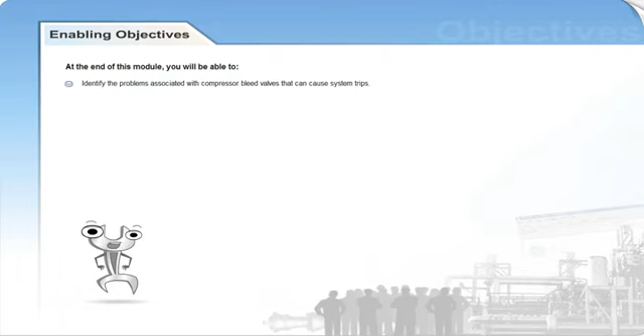Did you know that the unit trips if bleed valves do not open within 11 seconds of the generator breaker opening during shutdown? In this module, you will identify the main problems associated with compressor bleed valves and explain the procedures and inspections you can perform to reduce system trips. At the end of this module, you will be able to identify the problems associated with compressor bleed valves that can cause system trips, and identify the inspections and procedures needed to prevent trips due to compressor bleed valve problems.

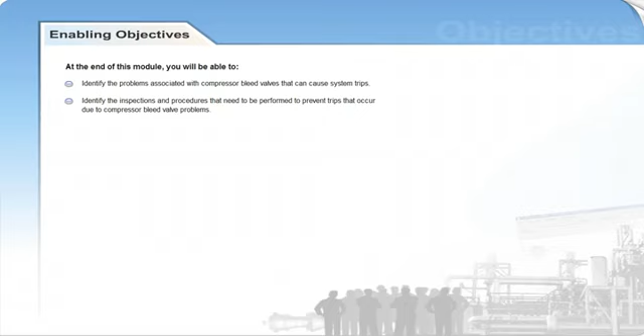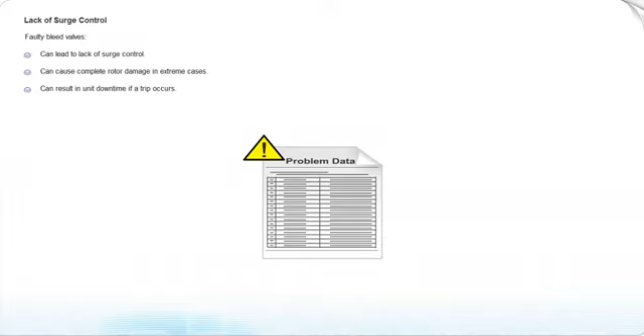It's important to keep track of the wide range of problems that faulty bleed valves can cause. Lack of surge control can cause complete rotor damage in extreme cases and, in all cases, can result in unit downtime if a trip occurs.

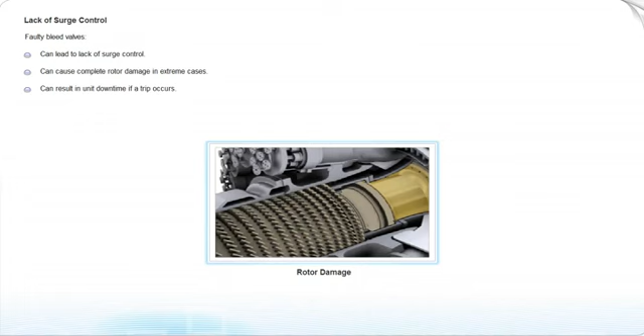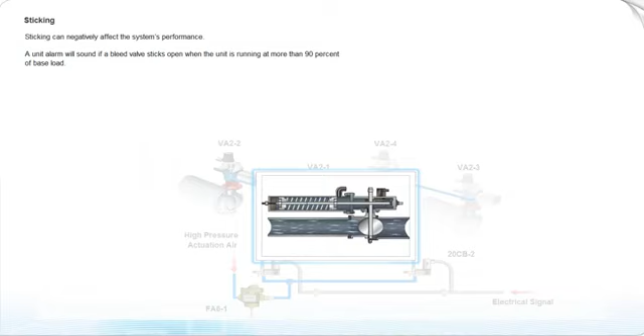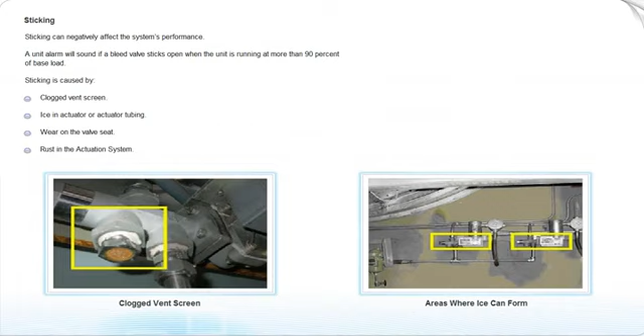Sticking is one of the primary problems associated with compressor bleed valves and can negatively affect the system's performance. If a bleed valve sticks open when the unit is running at more than 90% of base load, the unit alarm will sound. Sticking can be caused by a clogged vent screen, ice in the actuator or in the actuator tubing that carries the air supply, wear on the valve seat, or rust in the actuation system. Moisture, dirt, and oil are all in the vicinity of the actuation system. Therefore, the system requires regular cleaning and maintenance to prevent these contaminants from impacting the performance of the system.

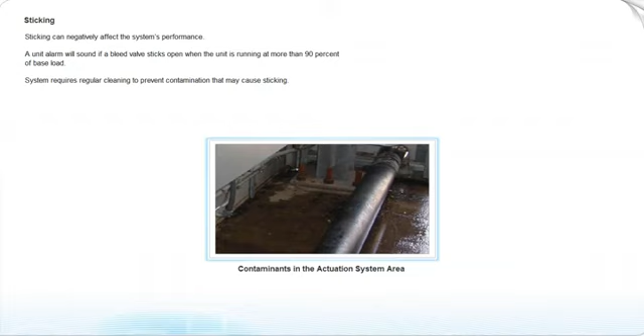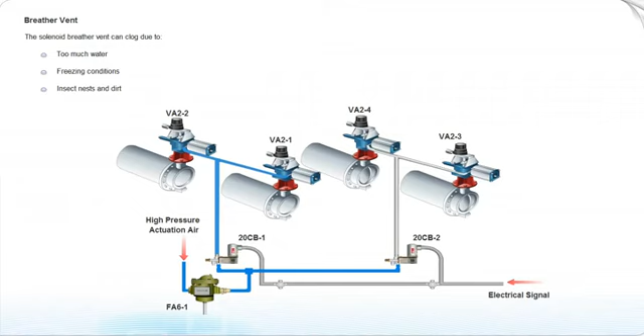The solenoid's breather vent can get clogged and may cause a system trip. Substances that might cause a clog are too much water, freezing conditions, insect nests, and even dirt. If this vent is clogged, the valves may not open at the correct time and the turbine may trip. Inspect the vent to ensure that the air can freely flow from the vent port of the solenoid to the atmosphere.

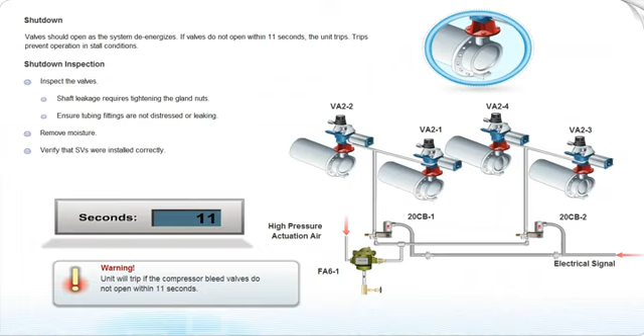During shutdown, the bleed valves should open as the system de-energizes. If the valves do not open within 11 seconds of the generator breaker opening, the unit will trip. The trip is necessary to protect the compressor from operating in stall conditions during shutdown.

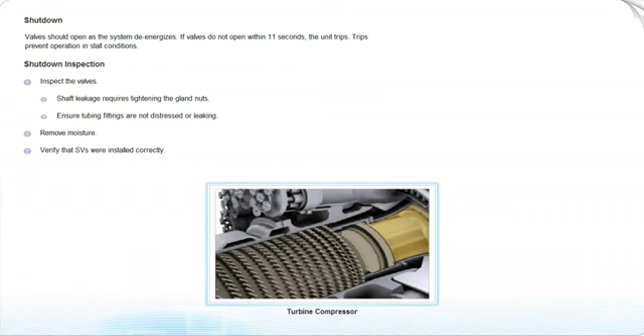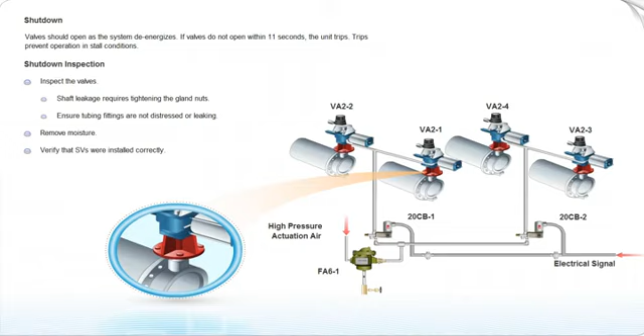If a trip occurs, perform the following inspection prior to restart. Inspect and test the VA2-1 through 4 valves to ensure proper actuation. Also check for leakage. If you can see shaft leakage through the packing box, tighten the gland nuts in half-turn increments until the leakage stops. Then inspect the tubing fittings to ensure they are not distressed or leaking.

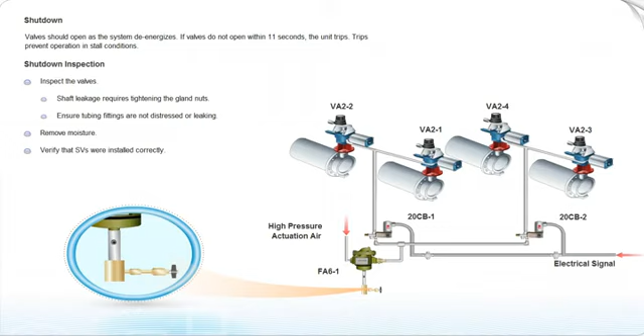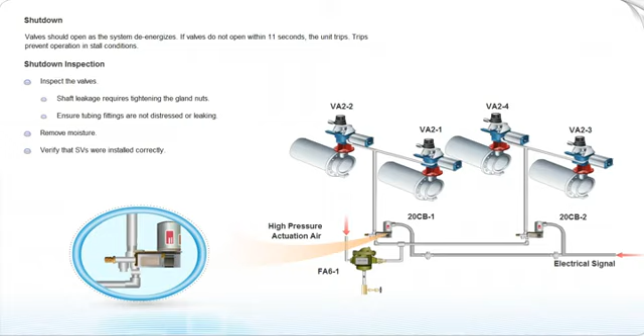The continuous blowdown function of the system should have routine inspection performed to confirm moisture is running away from the actuating air lines. Any moisture buildup in the system must be allowed to drain. Inspect the 20CB-1 and 2 solenoid valves to ensure they function properly and are installed according to the applicable drawings. These valves provide actuation air to the bleed valves that must be installed precisely as indicated.

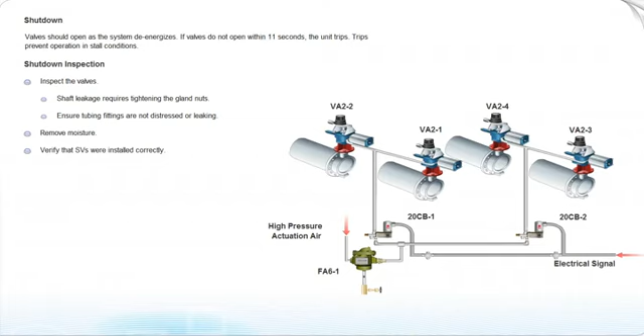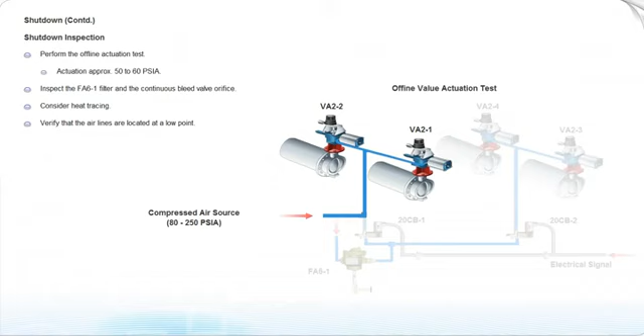Perform an offline valve actuation test using a portable compressed air source, 250 psia maximum, 80 psia minimum. Attach the compressed clean dry air source line to the 1-inch actuation air line at a location upstream of the solenoid valves 20CB-1 and 2 to test the system. You can attach the air line downstream of the solenoid valves to simply test the bleed valve actuation. Verify that the bleed valves actuate when pressure is applied to the line, approximately 50 to 60 psia.

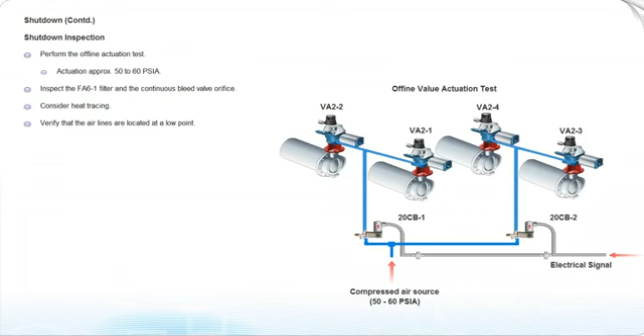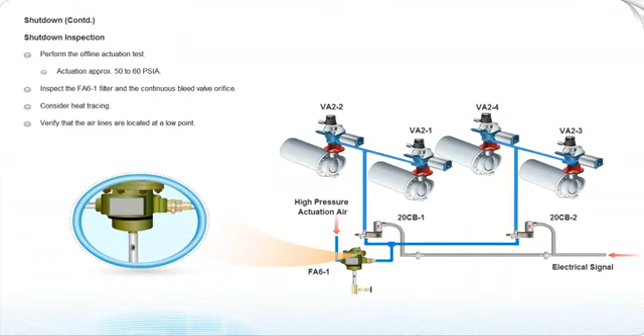For units so equipped, inspect the FA6-1 filter and the continuous bleed orifice to ensure they are not clogged and are free to drain. They should be installed, per the applicable drawings, at a low point relative to the solenoid valves to prevent the collection of condensation in the tubing.

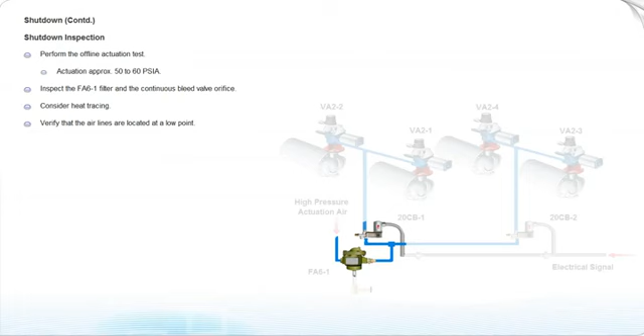For units in cold weather surroundings, the recommended procedure is heat tracing of the tubing, filter, and solenoid valves. It is also important that the actuating air lines slope to a low point to prevent them from freezing. Freezing of the solenoid or tubing can cause actuation issues with the bleed valves.

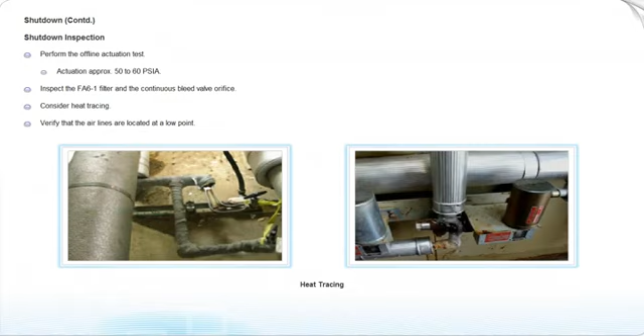During periods of extreme cold, condensation in the actuation air line can freeze inside the valve body, leading to slow or no actuation when required.

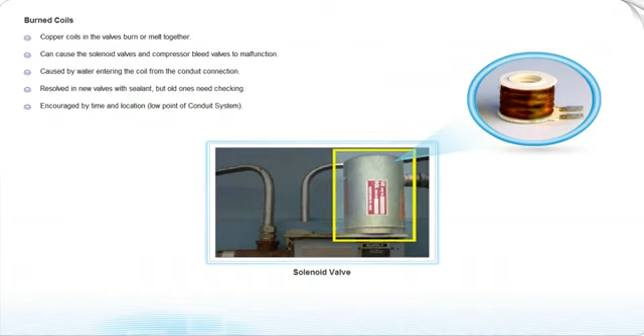Numerous valves have been returned to the supplier with burned or melted copper coils. Burned coils can cause the solenoid valves to malfunction, and as a result, the bleed valves will not actuate closed. The root cause is attributed to water entering the coil area from the conduit connection.

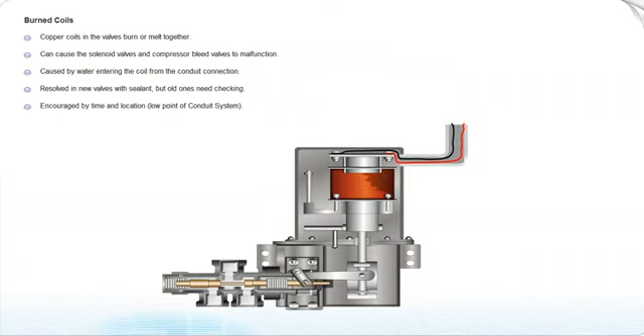The valve supplier is committed to supplying a sealant at this connection for future valves, but the 33 CB valves on the site should be checked for water.

The valve may sit outside for some period of time before the conduit is run to it, and even when the valve has conduit threaded to it, the valve is still the low point of the conduit system.

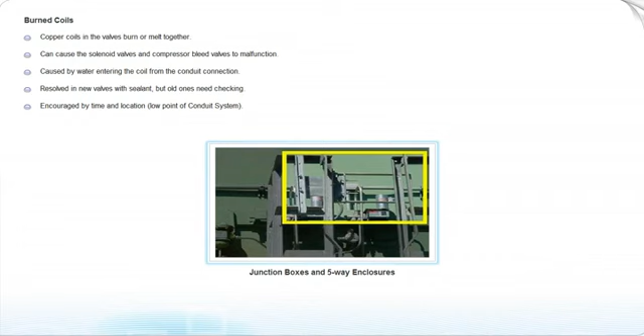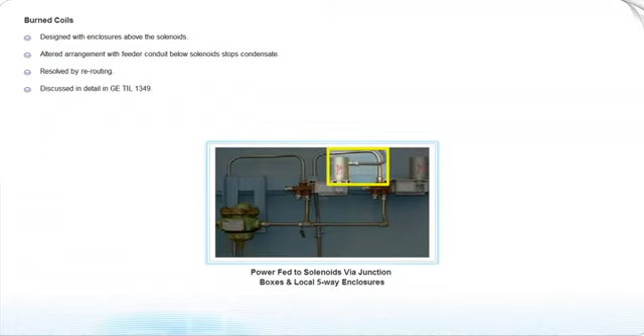Power is fed to the solenoids via junction boxes and local 5-way enclosures to pick up the device leads for the solenoids. As designed, the 5-way enclosures are placed above the solenoids, with conduit running down from each 5-way enclosure to the electrical housing of each solenoid.

The current design has moved the 5-way enclosures and the feeder conduit below the solenoids to prevent condensate in the conduit from flowing down into the solenoid. This rerouting makes the conduit the low point instead of the solenoid electrical housing.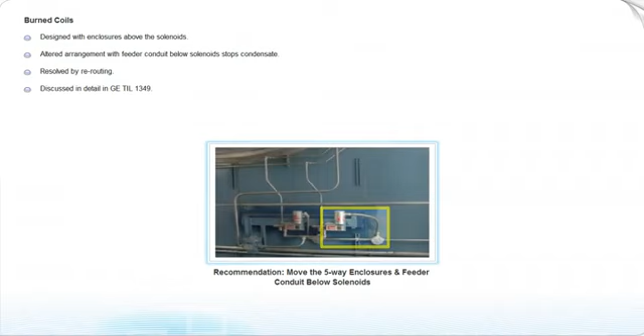The site can use existing parts to perform this modification.

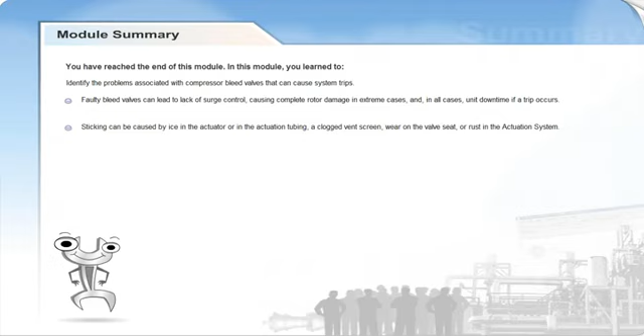Sticking can be caused by ice in the actuator or in the actuation tubing, a clogged vent screen, wear on the valve seat, or rust in the actuation system.

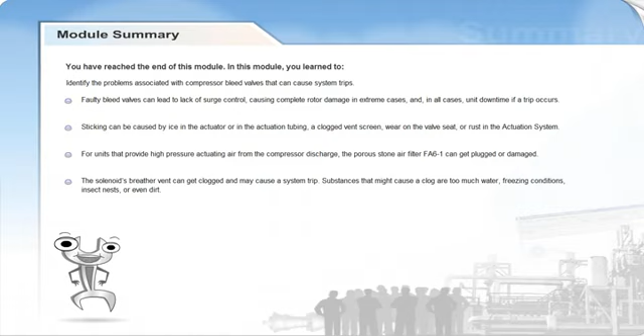For units that provide high-pressure actuating air from the compressor discharge, the porous stone air filter FA6-1 can get plugged or damaged. The solenoid's breather vent can get clogged and may cause a system trip. Substances that might cause a clog are too much water, freezing conditions, insect nests, or even dirt.

Compressor bleed valves are designed to be fully closed once the unit achieves full-speed, no-load conditions. Higher discharge pressures can cause a cylinder to move or change in shape, causing the disc to move in its seat and stick. Valves should open as the system de-energizes.

If valves do not open within 11 seconds, the unit will trip. Coils burn or melt due to water entering the coil area from the conduit connection.

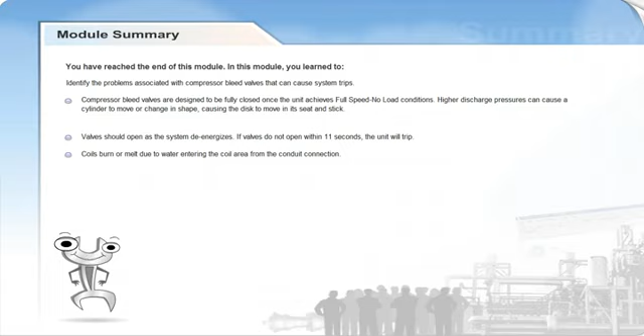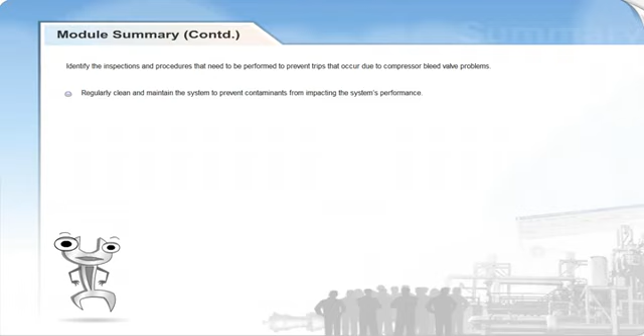Identify the inspections and procedures that need to be performed to prevent trips that occur due to compressor bleed valve problems. Regularly clean and maintain the system to prevent contaminants from impacting the system's performance.

Periodically open the drain valve to blow the porous stone air filter FA6-1 down and visually inspect for dirt and contaminants. Inspect the continuous bleed orifice for clogging as well.

Inspect the breather vent to ensure that air can freely flow from the vent port of the solenoid to the atmosphere. To ensure the compressor bleed valve discs are in the proper position, perform the bleed valve stop bolt adjustment procedure.

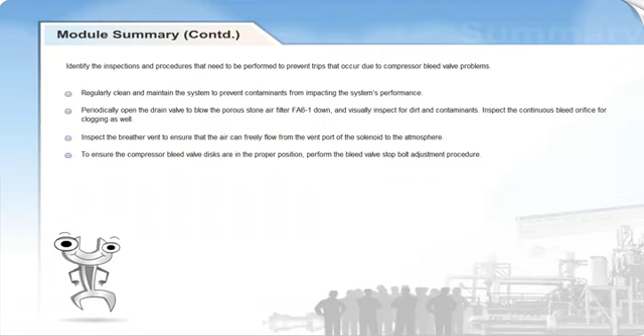If a trip occurs, perform the following shutdown inspections. Ensure proper actuation, and inspect the valves for visible signs of shaft leakage.

Inspect the tubing fittings for leakage. Confirm moisture is running away from the actuating air lines.

Ensure the solenoid valves have been installed according to the drawings and are functioning properly. Perform an off-line valve actuation test.

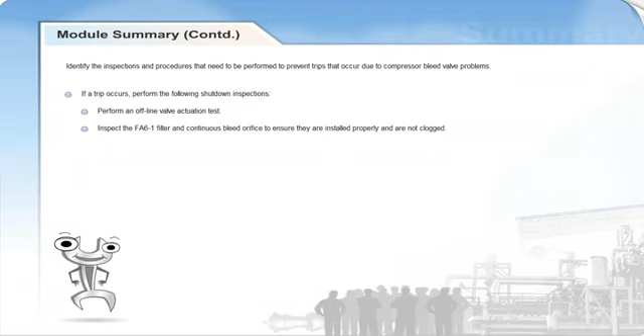Inspect the FA6-1 filter and continuous bleed orifice to ensure they are installed properly and are not clogged. Perform heat tracing of the tubing, filter, and solenoid valves for units in cold weather surroundings.

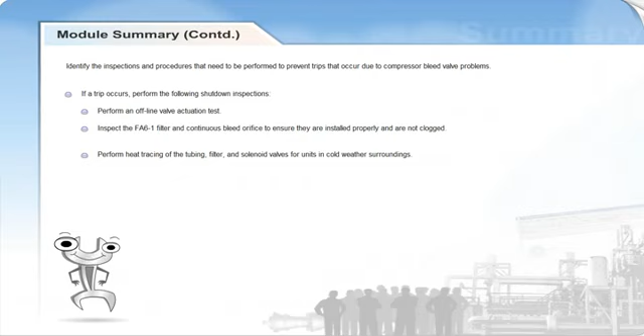To prevent the problem of burned coils, move the 5-way enclosures and the feeder conduit below the solenoids to prevent condensate in the conduit from flowing down into the solenoid.